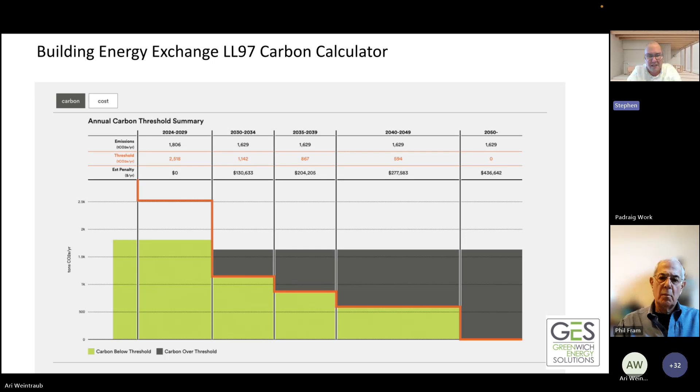We have seen plans in the future for further cutting that, but I believe that is contingent on monitoring actual progress. We don't know what's going to be happening with the grid, but we hope that we know some things that are happening with the grid.

New York State has a lot of projects in the works for offshore wind, for increased solar, as well as transmission lines bringing hydroelectric down into the New York City region.

We're also contending with the shutting down of Indian Point and things like that, which, despite being nuclear, was a major non-carbon emitting source of energy.

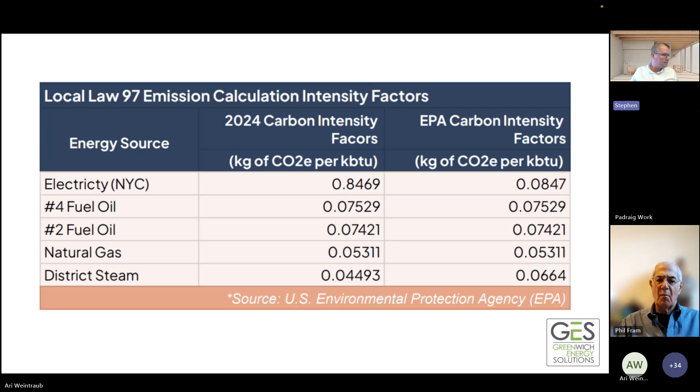Many people who've been working with the Department of Buildings on things like benchmarking, Local Law 87 energy audits, and retro-commissioning have been essentially using the gross square footage number from the Department of Finance to benchmark their buildings and comply with other things.

What we've been told time and time again is that the gross square footage number from the Department of Finance is not particularly reliable. We don't know in many cases where it's come from. We suspect it's from certificates of occupancy or offering plans or other things, but we've been told it reflects usable square footage, or alternately all of the above-grade square footage.

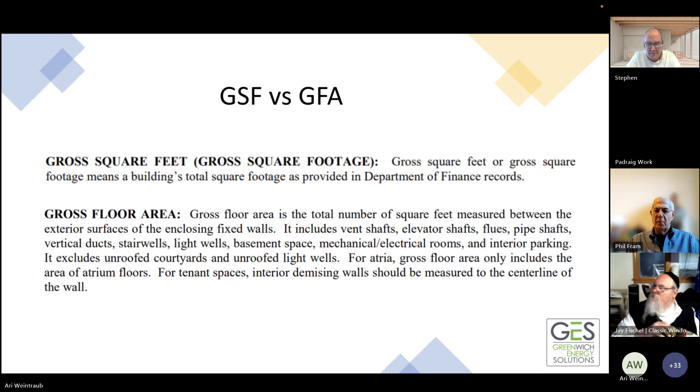The question we've been having is, how do we determine gross square footage and gross floor area in New York City buildings, where there's always stuff going on and sometimes a labyrinthine layout inside, and in many cases a lot of our buildings are residential, so it can be somewhat intrusive to get accurate measurements for them. What we've been doing is working with a collection of partners doing exterior laser scans.

This building in particular had about a 7.5% bump in their square footage as a result, compared to the Department of Finance record. Obviously the customer is very happy to hear they have a little more space to work with. That will, at least for the initial 2030 to 2035 period, give them some reduced fines in a do-nothing scenario, and means they have a little less work to do to bring themselves below that threshold.

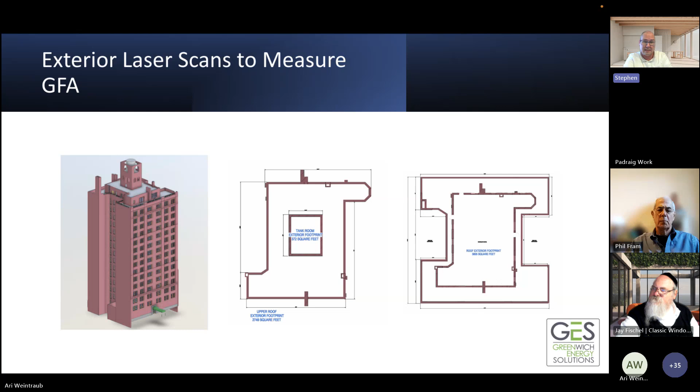Thank you very much, I was just about to ask. Do you measure the other spaces that are required? Yes. Okay, so yes, thank you, Valerie, you basically just asked the next question where we're going to be looking.

So Local Law 97 is not benchmarking, and I think it's important to note the very big differences between these. Energy benchmarking, which most of you are familiar with, you've been doing for the past 13 years I believe, has some interior space breakouts, but there's been a lot going on that's caused a lot of issues and confusion.

The EPA's Portfolio Manager tool requires certain spaces to be rolled up into the main space type, depending on their size and other things. Local Law 97, as far as we understand from the Department of Buildings, requires each space that is a separate entity to be called out and noted, with our measurements for the space as well as what space it is. For example, before, if you had multiple retail spaces, they could all be combined into one retail space for benchmarking purposes, and that was fine. Local Law 97, each one of those spaces needs to be broken out. Each commercial unit needs to be broken out separately by square area.

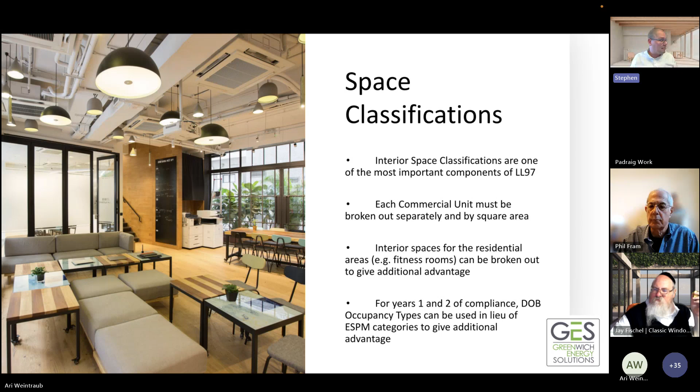Also, this is less relevant here, probably something that your customers or your building will need to determine: whether for years 1 and 2 of compliance, DOB occupancy types can be used in lieu of Energy Star Portfolio Manager categories. Can we go to the next slide, please?

Okay, I think this is addressing more of your question there, Valerie. So this year we did quite a lot of Local Law 88 assessments, and Local Law 88 in many cases requires that we have lighting power density. Looking at the hundreds of buildings that we work with, and knowing that they have quite irregular shapes inside, we thought that even a laser measure would not quite be enough to get us the information we need for lighting power density, watts per square foot.

So what we did was, this is not laser scanning, we actually used infrared scanning for this, and essentially created floor plans of the common areas for these buildings. This allows us to have a floor plan immediately available to us that is defensible and accurate.

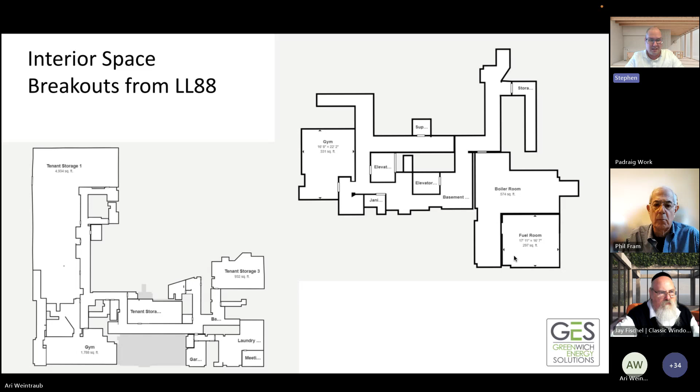One of the advantages we had by working with Local Law 88 was that we found that if we do this right the first time, we can make sure all of our clients are ready to go for Local Law 97 when it comes. So we think this delivered a lot of value for our customers, and it also allows us to do something very special, which is on our next slide.

Oh, there we go. Okay, great. So while we're doing this infrared scanning, we also created Matterport tours of these spaces. I don't know, Ari, are we able to click the link here that I have on this page?

This is basically a 3D tour that allows owners and operators, as well as trainees, to run through the mechanical rooms and have at their disposal manuals, spec sheets, data sheets, flow diagrams—essentially all the tools building owners and operators need, especially if they have turnover of their key personnel.

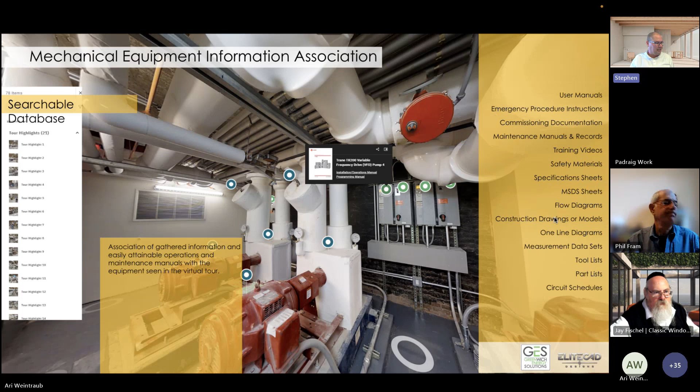All right, can we go to the next slide, please? And then this—so I'm glad we have at least one 3D example.

So this is actually a model we created of the mechanical room floor of a very large building, a large customer of ours. This is a demonstration showing that this is all done with lasers—it's a laser accurate layout of the entire space. So we can do rigging plans, and we can have our PEs do measurements from anywhere to anywhere in this.

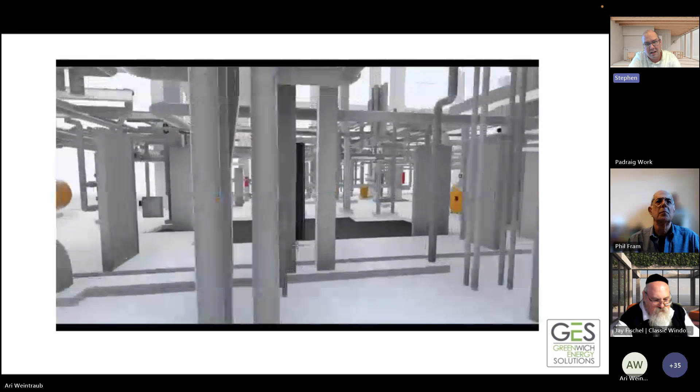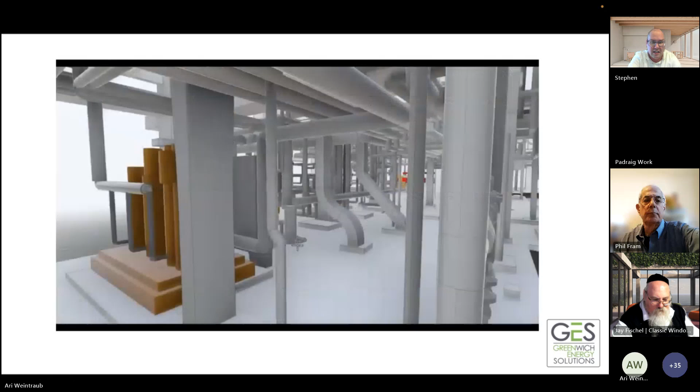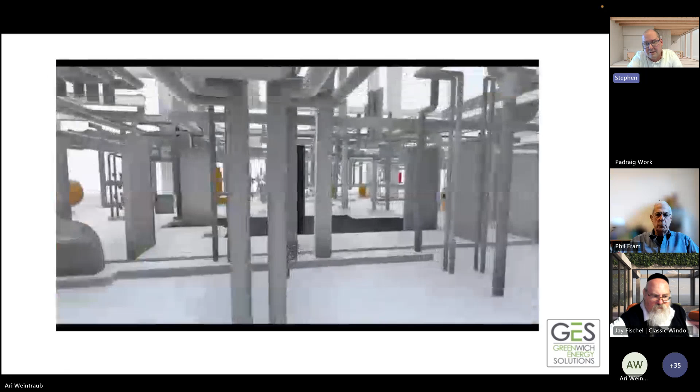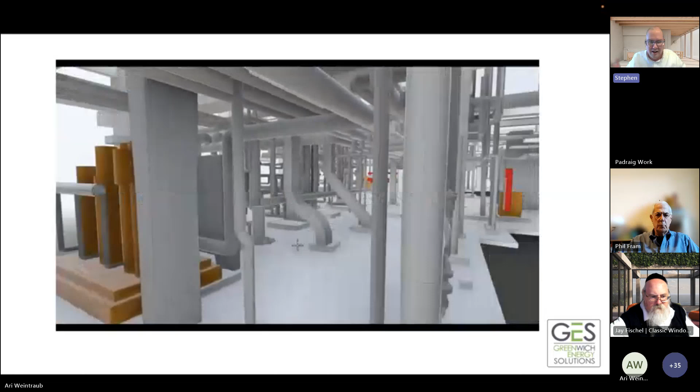Essentially having a digital twin allows us to assess things remotely, as well as spend some time working in the space without needing direct access, which is really helpful for us. Our team members are all over the city, and sometimes you do need to be on site, but for a lot of initial work, or when customers call and say, I don't know what's going on in this building, can you help me out, and I've already been to 30 buildings that week, I can at least pull something up and see what I should be looking at and what could possibly be going wrong.

So this is one of the services that we offer. We think it's going to be quite helpful. And then I'd like to close with one last one, which actually isn't a service of ours, but one of our partners.

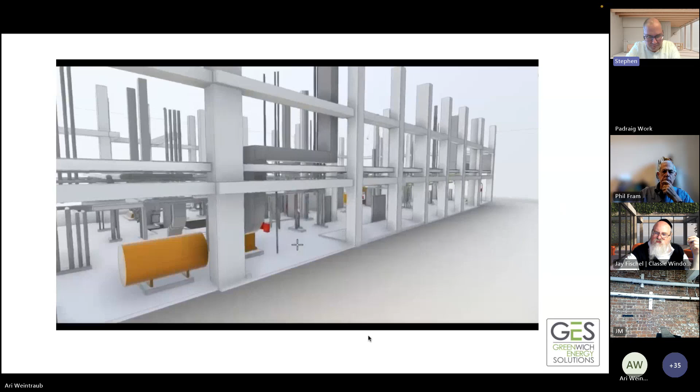This is Logical Buildings, and some of you may know them from demand response. From demand response, which essentially is for reducing energy consumption during times of peak demand, they are rolling out to all of our customers, as well as many others, carbon tracking, which allows real-time carbon emission tracking, as well as a special algorithm I think is quite impressive that allows for tracking based on your carbon caps.

So obviously the largest source of energy use in buildings is heating, which very inconveniently is concentrated both at the beginning and the end of the year. So if you end up blowing your budget early in the year because of a cold snap, you have a very hard time quantifying what your headroom is for the remainder of the year.

Through SmartKit AI, which is also their platform for demand response, we are integrating all of our tools to create a suite that will track interval data for the meters, so that your resident managers or building engineers get alerts that they're on track to exceed their carbon cap, and they can also check in if they want. My experience is that people mostly respond to alerts—they don't tend to check in on these things themselves. But it's a very powerful tool, and in concert with the other tools we're putting together, I think it's quite useful for managing carbon emissions going forward.

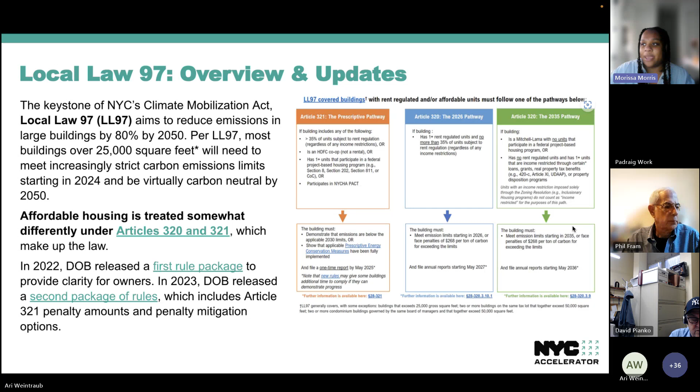So I will talk a little bit about which buildings may have a different pathway to compliance, specifically under Article 321. Of course, everyone defines affordable housing differently. So it's defined under the law under Article 321 as buildings with more than 35% rent regulated units, HDFC co-ops, and buildings with one or more units with federal project-based funding.

That's like Section 8, Section 202, 811, and NYCHA Pact and RAD buildings. Now, if your building has at least one rent stabilized unit, but less than that 35%, you actually have delayed compliance. That means starting in 2026 is when you would need to start reporting your emission limits, all the way through to 2050, and although you fall under Article 320, you do have that delayed compliance.

Then there are Mitchell-Lama rentals and co-ops that have no federal project-based funding, or buildings that have no rent regulated units but at least one or more income restricted units. You have a longer delayed compliance period. You would comply under Article 320, but your first report would not start until you begin complying in 2035, with your first report due in 2036.

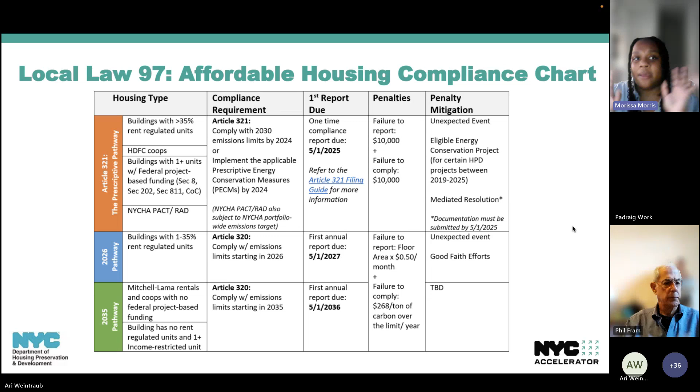So definitely take note if you have any buildings that fall under any of these categories—it has to comply with Local Law 97 very differently. If you have any that fall under the 2026 or 2035 pathway, feel free to reach out and let me know. I can definitely help you along with what that looks like for your property, but I'm going to hyper focus on Article 321.

So this is that same portion of the chart just blown up a little bit bigger. I already mentioned what buildings fall under Article 321. The compliance requirement is one of two things: you either need to comply with your 2030 emission limits by the end of this year, or implement all the applicable prescriptive energy conservation measures by the end of this year.

It is a one-time compliance requirement, so there's a one-time report due May 1st of 2025. And there are two penalties associated with Article 321: there's a failure to report penalty of $10,000 and a failure to comply penalty of $10,000.

That's also very different than the penalties under Article 320. It's also important to note that these can be recurring fines, although it is a one-time compliance requirement. So it's very important to make sure that you are reporting and have some sort of compliance—one of the pathways completed—so that way you can avoid these fines. And then there are some penalty mitigation opportunities if you need a little extra time to comply. We'll talk about that in just a little bit.

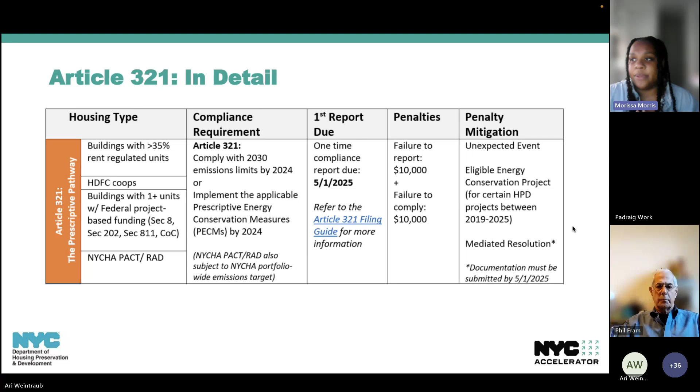So here's your timeline at a glance. No matter what, emission limits begin for all buildings starting this year. If you are under the Article 321 compliance deadline, you have until the end of this year to complete one of the pathways, and then your one-time compliance report is due May 1st next year.

If you have any of the delayed pathways, so the 2026 pathway, your emission limits start 2026, with your first report being due May 1st of 2027. And then the 2035 pathway—if you fall under that pathway, your emission limits begin 2035 and your first compliance report is due May 1st of 2036.

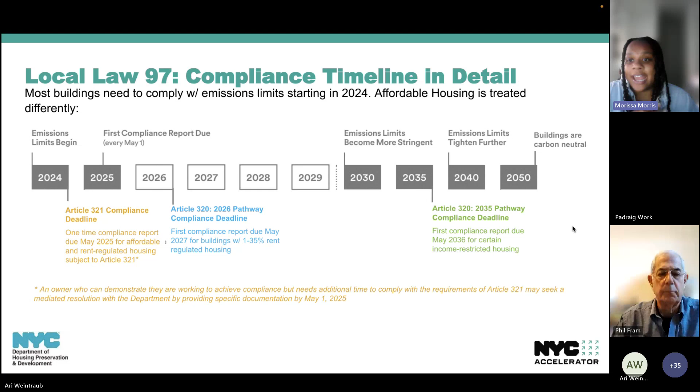So here it is at a glance. If you have any questions on this timeline, of course, just let us know. If you have buildings that fall under multiple timelines, that's what we're here to help you with—to kind of navigate what your plan is moving forward.

So here are the two pathways to compliance under Article 321. The first one is demonstrating that for this year, in 2024, your building is already under that 2030 emission limits. So you would use your Local Law 84 benchmarking data—you saw earlier the Building Energy Exchange Calculator, that's a really great way at a glance to see how your building is doing. And then by May of 2025, submitting a report to the DOB certified by a registered design professional that your building is under that 2030 limit.

Or you would implement all the applicable prescriptive energy conservation measures, or the PECMs, by the end of this year.

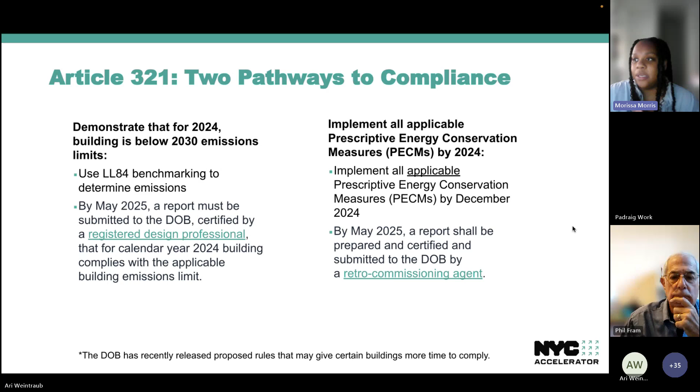And you would submit a report by May 1st of 2025 showing that all of them have been completed, certified by a retro commissioning agent. And we can move to the next slide so I can show you what the 13 prescriptive measures are.

If you are familiar with this list, amazing. If you're not, this is at a glance, high level, what the 13 prescriptive measures are. I won't go through every single one of them, but some of them fall under general measures.

So those are checking temperature set points, insulating all of your hot water pipes, et cetera. One of the things I want to point out is upgrading common area lighting that aligns with the Local Law 88 requirement that is due by the end of this year. There are some that are particular to steam systems, so one pipe and two pipe steam systems will have to implement those. And then some other maintenance measures that you will need to make sure are being upkept in your building.

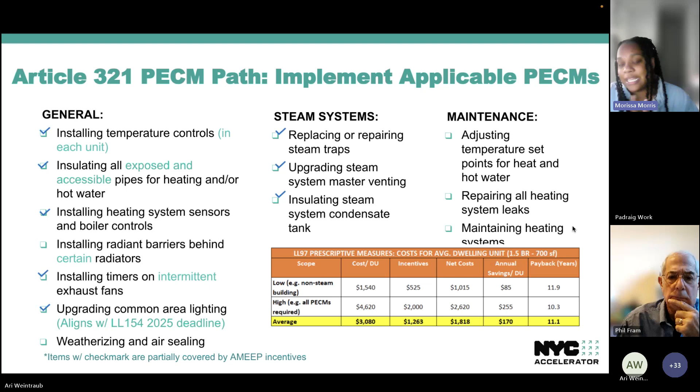I'll also note that all of the measures that have a blue check mark next to them are ones that can be incentivized through different utility programs. So there is some help out there to help incentivize and pay for these measures. If you are looking for that help, reach out to us, get connected with an account manager, and we'll be able to let you know what incentives can be applied to your scope.

I also think that a lot of buildings think the prescriptive measures sound like a really good opportunity. However, there's that other pathway, the 2030 pathway. So why would you want to necessarily choose that pathway?

It depends on what your building's future plans are. So let's say, for example, if your building is already performing super close to the 2030 limit, or if you're planning a deep retrofit in your building, an oil to gas conversion, or planning electrification, it might make sense for you to do the 2030 pathway over the prescriptive measure pathway.

So your plan of action here is to determine your building's performance in relation to those emission limits, create a building energy efficiency plan, and choose projects to reduce your greenhouse gas emissions to meet those limits.

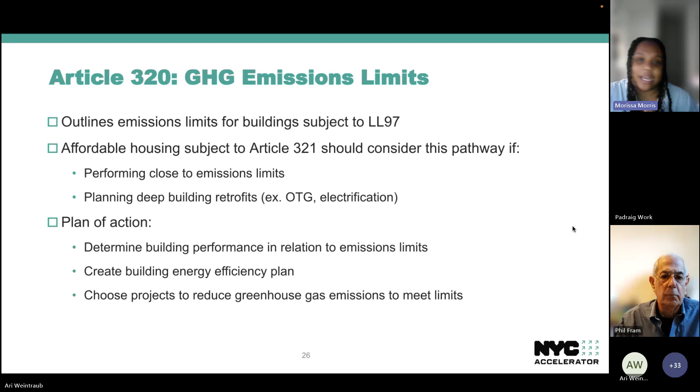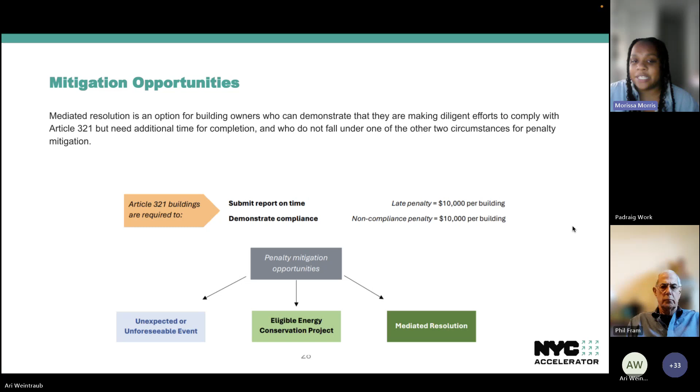Now I will talk very briefly about the penalty mitigation opportunities that are available for buildings under Article 321. So I mentioned there's those two penalties, the $10,000 late penalty and the $10,000 noncompliance penalty. We can move to the next slide.

And there are 3 penalty mitigation opportunities. So if you need a little bit more time to comply, and you're not going to be done by the end of this year, there are 3 different things that you can possibly file under.

So the first thing is if there's an unexpected or unforeseeable event. If your building is damaged as a result, including but not limited to a hurricane, severe flooding, or fire, you can absolutely get a little bit more time to comply and be able to mitigate those penalties.

Or if you're doing an eligible energy conservation project. These are buildings that received funding from a housing agency as of November 15th of 2019, demonstrating that they implemented an eligible energy conservation project. If you need more information about that in particular, reach out to us and we can see if your project may be eligible to apply under this penalty mitigation opportunity.

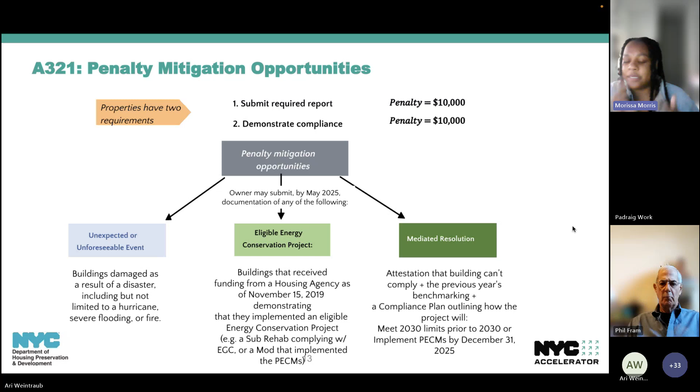The last one is mediated resolution, and I think most buildings will be complying under this if they're looking for extra time. The mediated resolution offers buildings more time under Article 321, where you can then meet your 2030 limits by 2030, or implement the prescriptive measures by the end of December 31st of 2025.

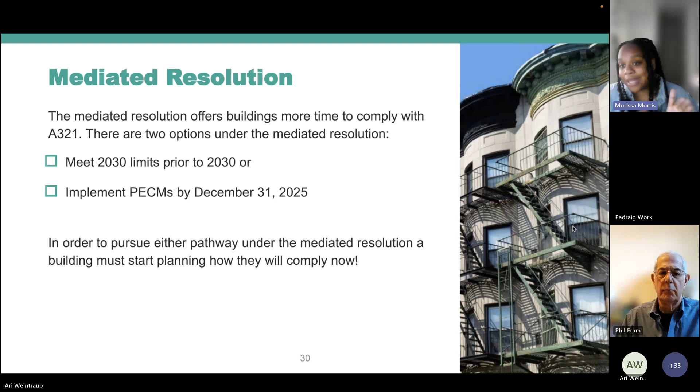So you get a full year of extra time for the prescriptive measures, or you get until 2030 to meet those 2030 limits. So if you do need that extra time to comply, reach out to us, and we'll give you more information on the mediated resolution in particular, so that you know exactly what you need to submit next year to be able to get that extra time.

One opportunity I would love to highlight is through Con Edison. They have a Local Law 97 limited offering for affordable housing that falls under Article 321. So if you're trying to get those prescriptive measures done, there are incentives out there, as I mentioned for you.

Here's a list of measures that they are incentivizing through this program in particular. You already know your incentives up front, which is great, so you know before you even get your proposals back how much money you could be saving. If that's something you're interested in and you want to get that extra funding to complete those prescriptive measures, you can reach out to me directly and I can take a look at your building, see how you may be able to take advantage of these incentives.

Lastly, here's how we work with buildings in particular. Firstly, we help clarify those Local Law 97 requirements, and then we identify those greenhouse gas emissions and compare them to limits, and then determine what pathway is appropriate. Does it make sense to meet that 2030 limit, meet the greenhouse gas emissions, or does it make sense to implement the prescriptive measures? Then we'll also help identify applicable financing and incentive programs, assemble a team of service providers, and provide project management support through project completion. So whatever help you need is what we're here for.

But with that, I'll pass it back over to Ari to continue.

Thank you so much, Morissa. I'm getting a little short on time, so I'm going to speed it up a little bit. Morissa's fantastic, we do a lot of work together with her and Accelerator. Definitely reach out, we'll have contact information at the end.

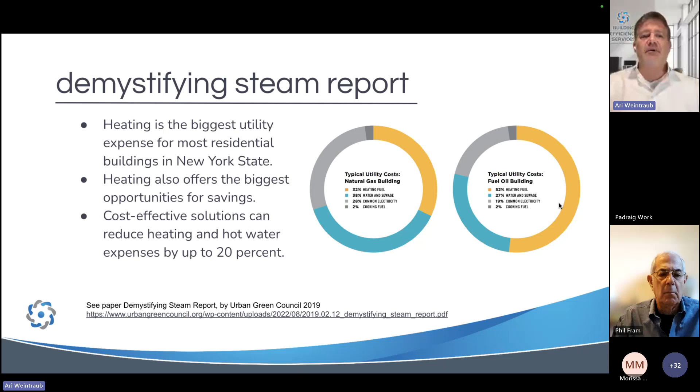Very briefly, steam systems are still usually one of the best opportunities to bring down your carbon emission limits, balancing and running your steam system more efficiently. This was highlighted in a report, a paper by Urban Green Council, covering a number of common issues and the solutions.

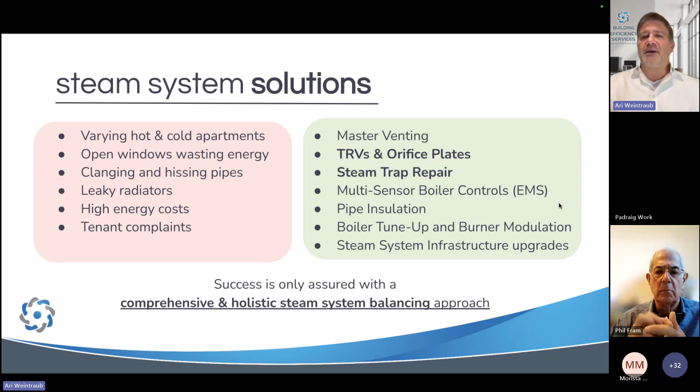You have varying hot and cold apartments, tenant complaints, open windows during the winter. That's a big one, energy literally going out the window. A lot of the solutions to these are actually among those 13 prescriptive measures that Morissa just spoke about. Really, we take a comprehensive and holistic approach to balancing your steam system.

Briefly, steam traps, TRVs, if you're familiar with a steam system, these are tools or parts of your radiator that will help it run more efficiently. Pipe insulation keeps heat from escaping during distribution.

Orifice plates is actually an important one. We've been getting these, generally for larger buildings, two-pipe steam system buildings. They replace the need for steam trap repair, which occurs every 3 to 5 years as steam traps fail, and ensure an even distribution of steam throughout the building.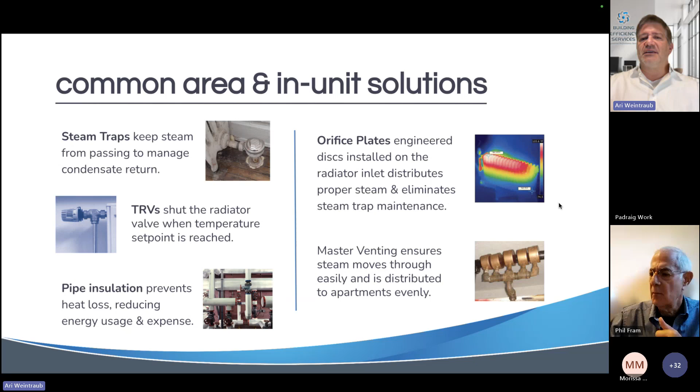Master venting, also one of the measures, happens in the boiler room, usually in the common area of the building, to allow steam to pass through the system easily.

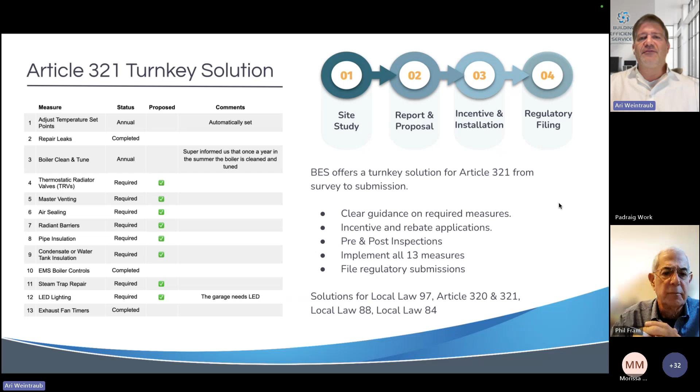We help clients and buildings with Local Law 97, both 320 and 321, as well as Local Law 88 and 84. We'll have contact information at the end if you want to talk about your building.

This is what we call a scorecard. We also do larger multi-building projects, for example NYCHA PACT, which we'll have as a case study. I'll talk about it briefly, but we're completely paperless. We provide these kinds of reports to management, and they can see in real time the progress throughout the building.

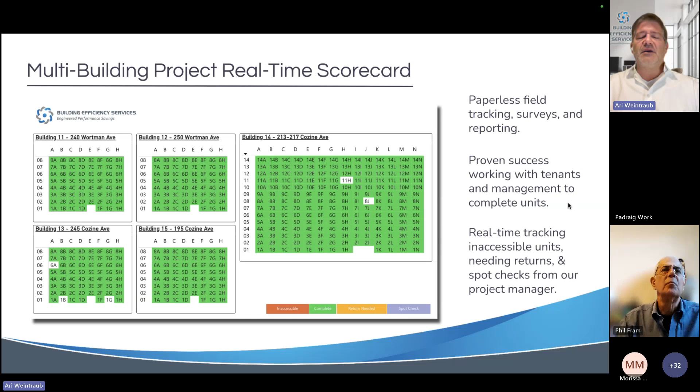We also have a very good success rate of getting access. We work with management and tenants to get access to every unit. A lot of times there are units that are just inaccessible for whatever reason, but we have a really high success rate with that as well.

A couple of questions we asked a while ago to the DOB when the rules were first coming out. This is closer to the beginning of the year, but I think it's still relevant to ask: are radiant barriers needed for one-pipe steam? That's one of the 13 measures, and it wasn't crystal clear on the requirement for one-pipe steam. The good news is that as a general rule of thumb, if you are going into the radiator, meaning you're going to be doing TRVs, which is also a requirement for two-pipe, then you need to do radiant barriers. For a one-pipe steam system, though, it's not explicitly required.

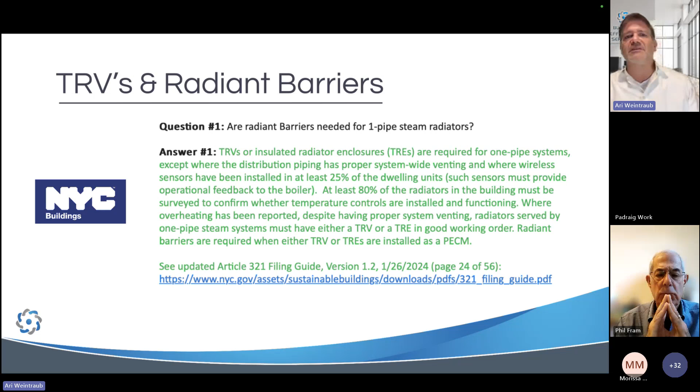Second thing, Morissa also mentioned the $10,000 penalty for either non-compliance or not filing. Our question was, is this a one-time or an annual penalty? Basically, DOB says it reserves the discretion to issue recurring penalties.

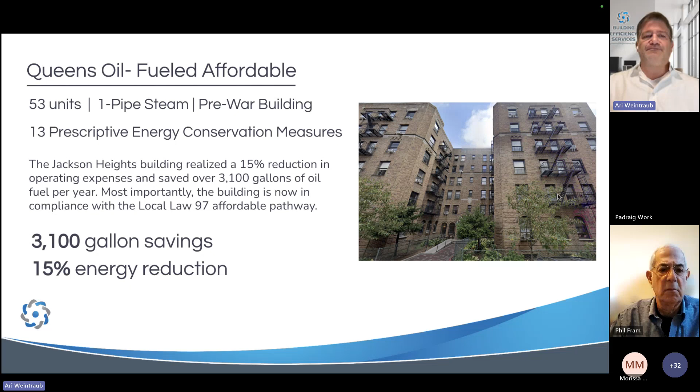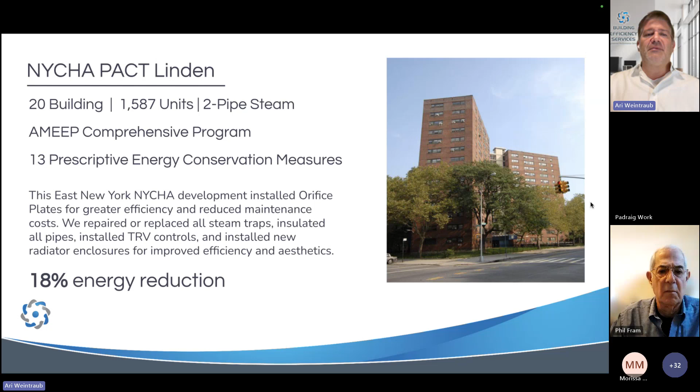And this was the NYCHA PACT that I showed you a scorecard of before, a 20 building project, almost 1,600 units. We did a full AMEEP comprehensive program there. Saved the building a lot of money on their retrofit, and they implemented the full 13 measures at that building for Article 321.